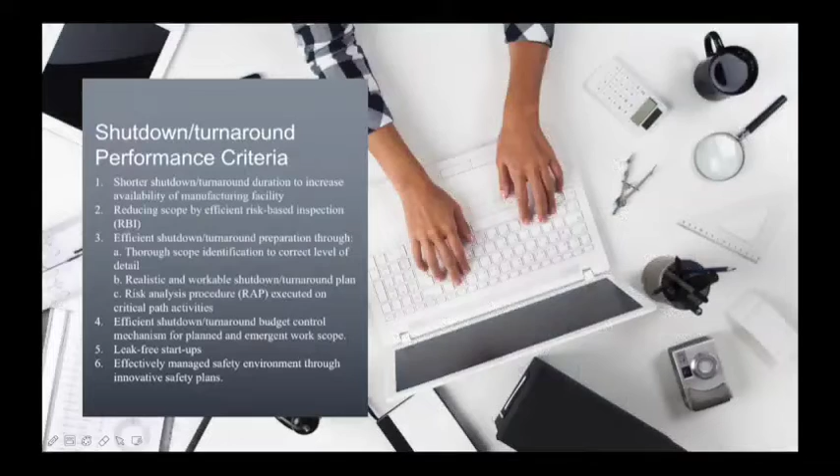And finally, shutdown or turnaround performance criteria. Shorter shutdown or turnaround duration to increase availability of manufacturing facility, reducing scope by efficient risk-based inspection, efficient shutdown or turnaround preparation through thorough scope identification to correct level of detail, realistic and workable shutdown or turnaround plan, risk analysis procedure executed on critical path activities, efficient shutdown or turnaround budget control mechanism for planned and emergent work scope, leak-free startup, effectively manage safety and environment through innovative safety plans.

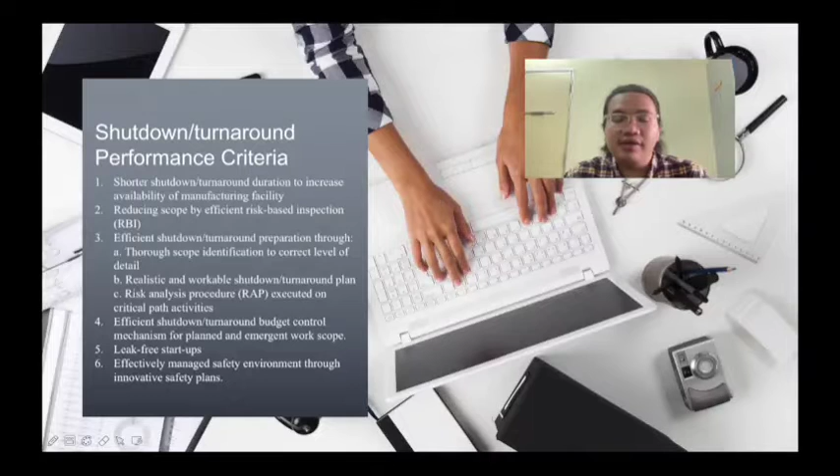Today, I would like to discuss my topic, which is planning. Shutdown planning is uniquely challenging and is considerably more challenging than routine running maintenance, as the shutdown durations are kept extremely short because of the need to keep the unit down to a minimum period. Not only that, planning is the technique of picturing ahead every step in a long series of separate operations and so indicating that for each step routine arrangement suffices to cause it to happen in the right place at the right time.

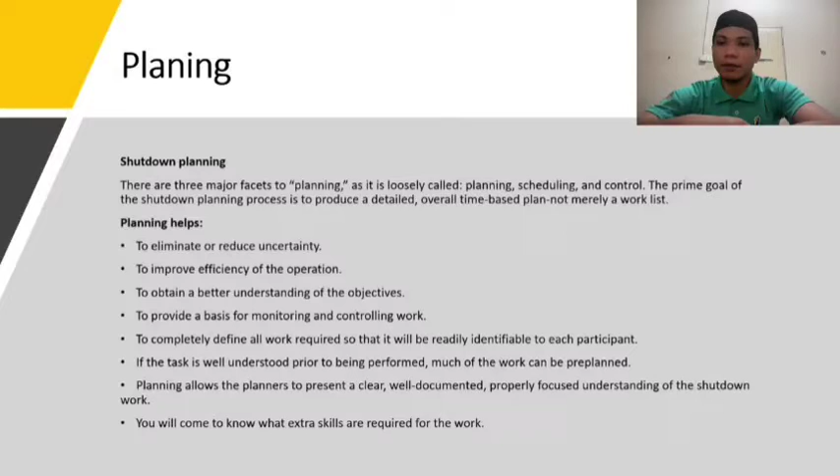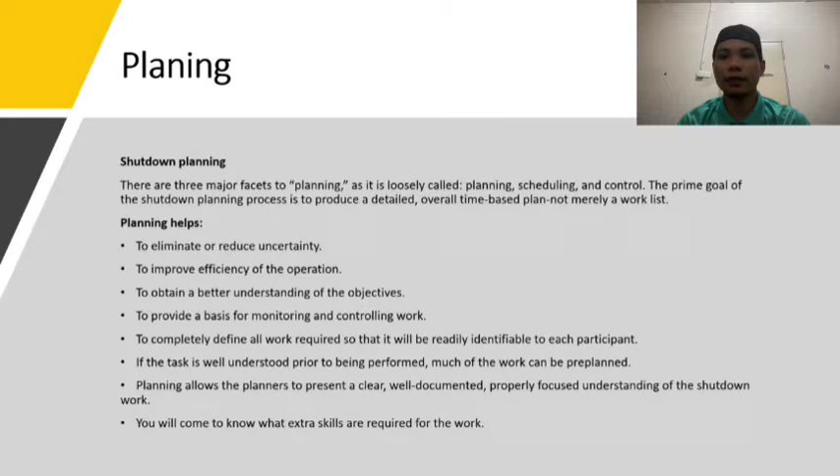Shutdown planning. There are three major facets to planning, as it is loosely called: planning, scheduling, and control. The prime goal of the shutdown planning process is to produce a detailed, overall time-based plan, not merely a work list. There are several planning helps.

First, to eliminate or reduce uncertainty. Second, to improve efficiency of the operation. Third, to obtain a better understanding of the objective. Fourth, to provide a basis for monitoring and controlling work.

Fifth, to completely define all work required so that it will be readily identifiable to each participant. Sixth, if the task is well understood prior to being performed, much of the work can be pre-planned. Seventh, planning allows the planner to present a clear, well-documented, properly focused understanding of the shutdown work.

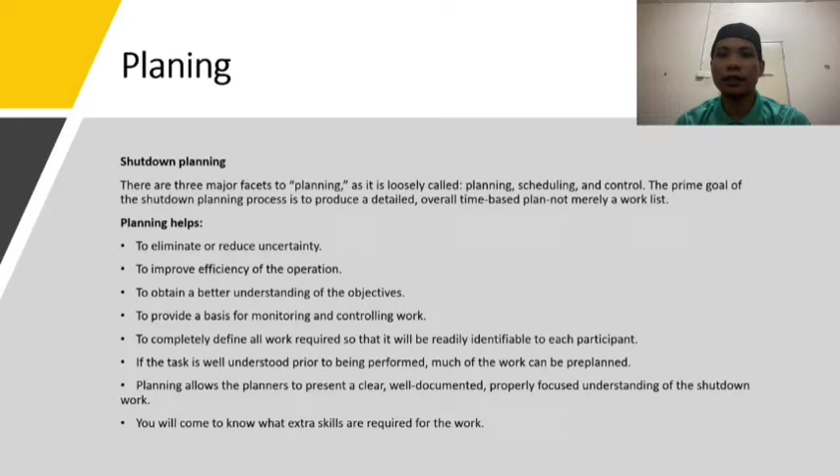Last but not least, you will come to know what extra skills are required for the work. Shutdown planning should begin 9 to 18 months before the anticipated shutdown takes place. 7 areas. First, procurement. Second, engineering. Third, maintenance. Fourth, operation. Fifth, quality assurance. Sixth, health, safety, and the environment, HSE, security. And the last one, administration.

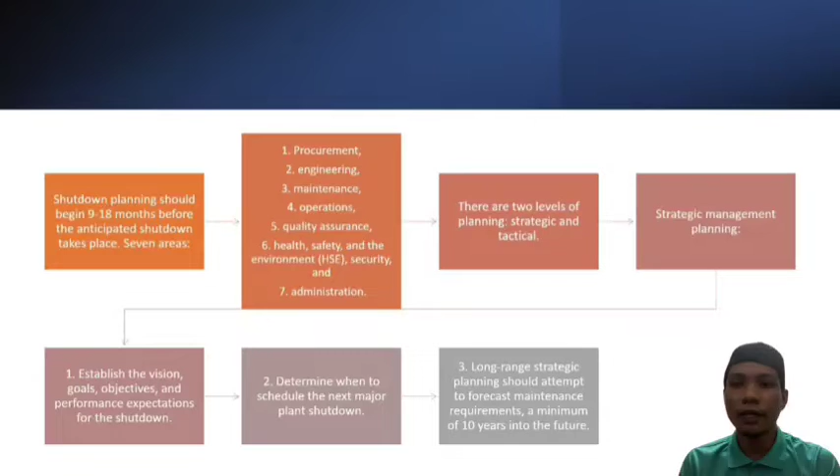There are two levels of planning, which are strategic and tactical. Strategic management planning means, first, establish the vision, goals, objectives, and performance expectations for the shutdowns. Second, determine when to schedule the next major plant shutdowns, as information from marketing, sales, accounting, operation, and maintenance is analyzed and incorporated into the business plans and can provide a long-term strategic plan.

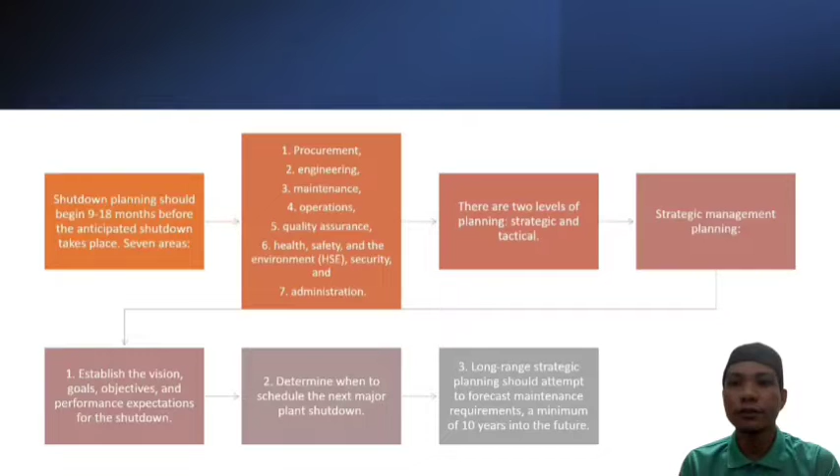Third, long-range strategic planning should attempt to forecast maintenance requirements a minimum of 10 years into the future. Fourth, a practical planned shutdown may be used to eliminate the process failing condition in one area of the plant. Fifth, process conditions such as internal fouling and catalyst life may require the plant to be shut down. A risk assessment of acceptable minimum flow rates and product specification will determine when the plant is required to come offline to correct this process bottleneck.

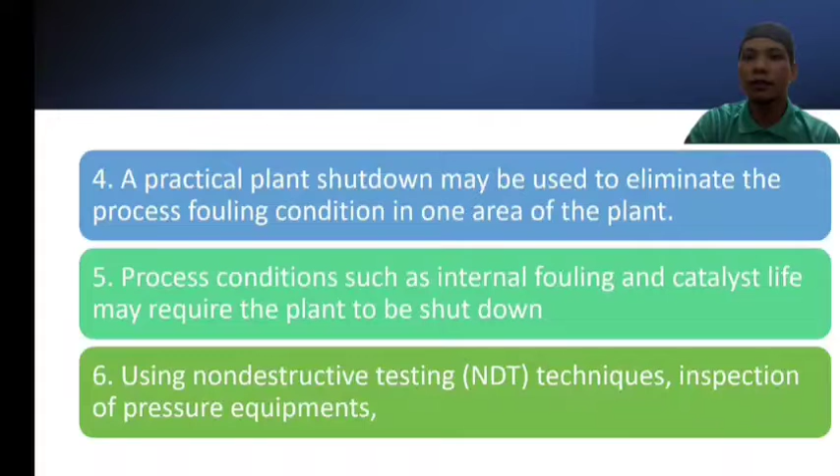Shutdown planning committee. Treat the shutdown like any other project using classic project management techniques. Applying project management techniques for planning, monitoring, executing, and controlling the progress of the shutdown can delineate various scheduling, resource, and cost questions such as: is the amount of work doable within the allotted period? What are the critical path jobs for completing the shutdown on schedule? Have enough resources, personnel, time, money been allocated? How much do I anticipate the shutdown to cost? Can I stay within budget?

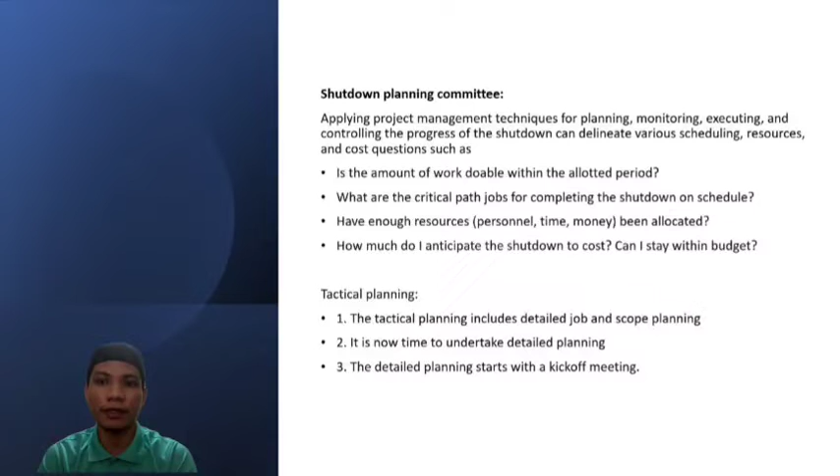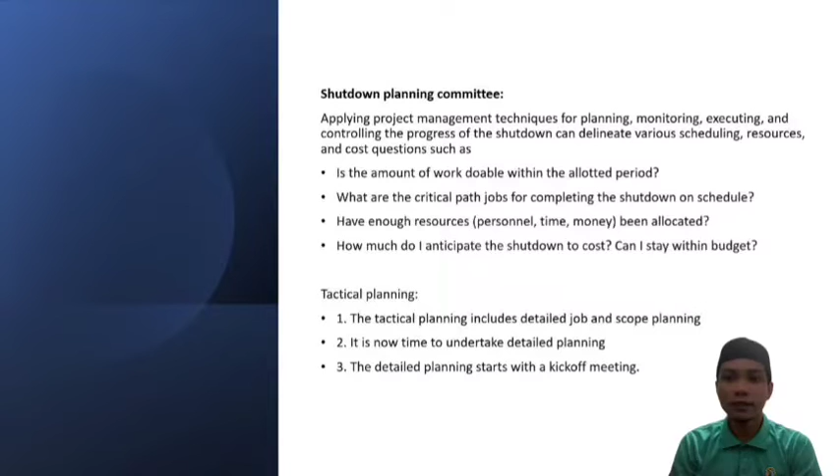There are three points of tactical planning. First, tactical planning includes detailed job and scope planning, preparing the estimate, preparing the shutdown organization, and detailed planning for quality and safety. Second, it is now time to undertake detailed planning to ensure that the activities performed in the execution phase of the project are properly sequenced, resourced, executed, and controlled. Third, the detailed planning starts with a kick-off meeting.

There are 4 kick-off meeting points. First, the major players responsible for planning, including the shutdown manager, section engineers for certain areas of knowledge, subject matter experts, and functional leads. Second, the major players are usually authorized by their functional area to make decisions concerning timing, cost, and resource requirements. Third, the following subjects: turnaround policy, plant standards, work list, major task review, project review, inspection review, spares review, safety review, quality review, and site logistics.

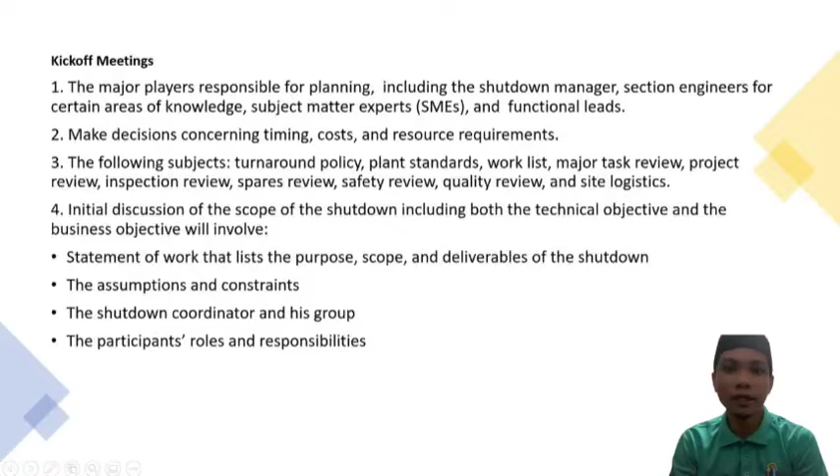Fourth, initial discussion of the scope of the shutdown, including both the technical objectives and the business objectives, will involve: first, a statement of work that lists the purpose, scope, and deliverables of the shutdown. Second, the assumptions and constraints. Third, the shutdown coordinator and his group. And the last one, the participants' roles and responsibilities.

Job of the planning team. There are 11 typical roles and responsibilities, which would include but not be limited to: first, gathering basic data for planning from plant and other necessary personnel. Second, producing task specifications and networks for all small tasks. Third, specifying bulk work tasks and listing them on control sheets. Fourth, producing material requirement sheets for specified tasks. Fifth, producing equipment and service requirement sheets.

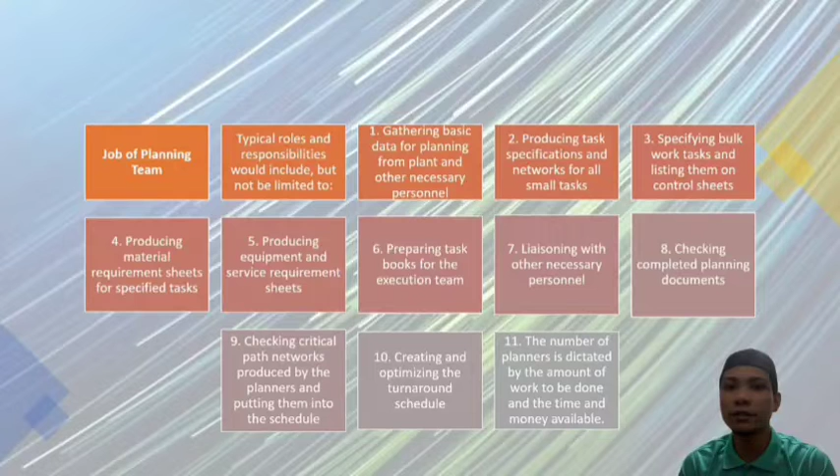Sixth, preparing task books for the execution team. Seventh, liaising with other necessary personnel. Eighth, checking complete planning documents and passing them to plant personnel for validation. Ninth, checking critical path networks produced by the planner and putting them into the schedule. Tenth, creating and optimizing the turnaround schedule. Last but not least, the number of planners is dictated by the amount of work to be done and the time and money available.

Planning step 1. There are 8 points we need for developing the shutdown work list. First, the goal of the shutdown planner should be to produce a detailed time-based plan. Development of the shutdown work list should begin immediately after completion of the preceding shutdown. Second, during the period between shutdowns, maintenance technicians should add potential work to the work list as they recognize the work.

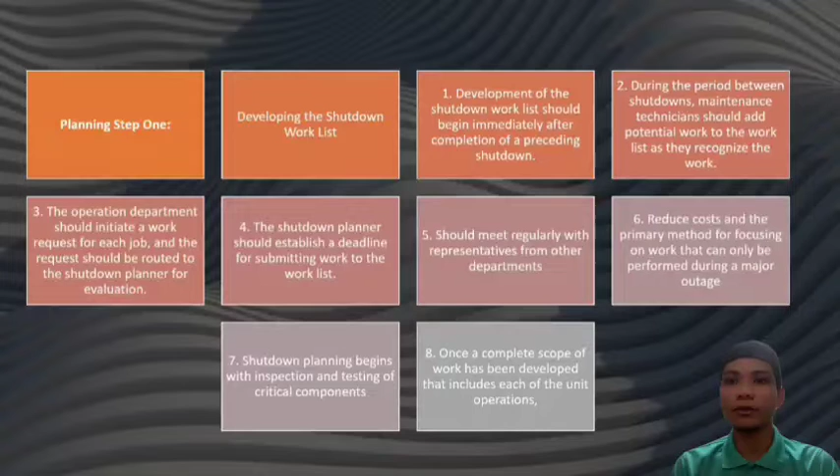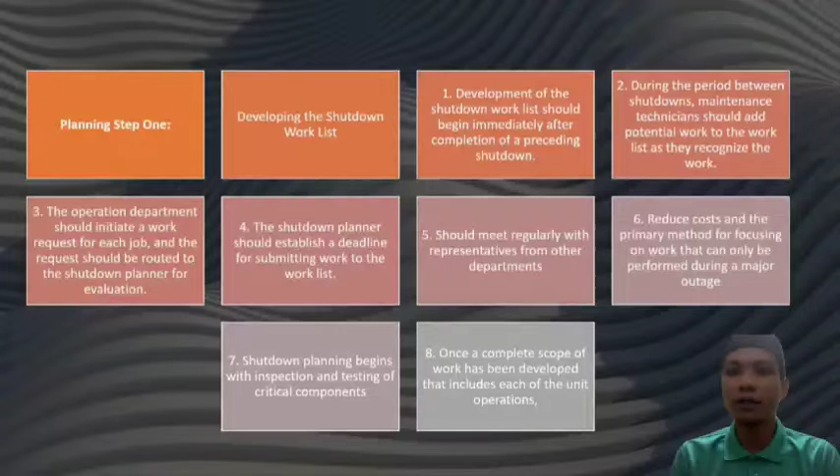Third, the operation department should initiate a work request for each job and the request should be routed to the shutdown planner for evaluation. 4. The shutdown planner should establish a deadline for submitting work to the work list. 5. The shutdown planning team should meet regularly with representatives from other departments involved in the shutdown to review the work list. 6. Keeping the list short is both a means to reduce cost and the primary method for focusing on work that can only be performed during a major outage.

7. Shutdown planning begins with inspection and testing of critical components such as relief valves, repair, and replacement of damage. 8. Once a complete scope of work has been developed that includes each of the unit operations, the material, manpower, and duration of the work can be determined for each of those units.

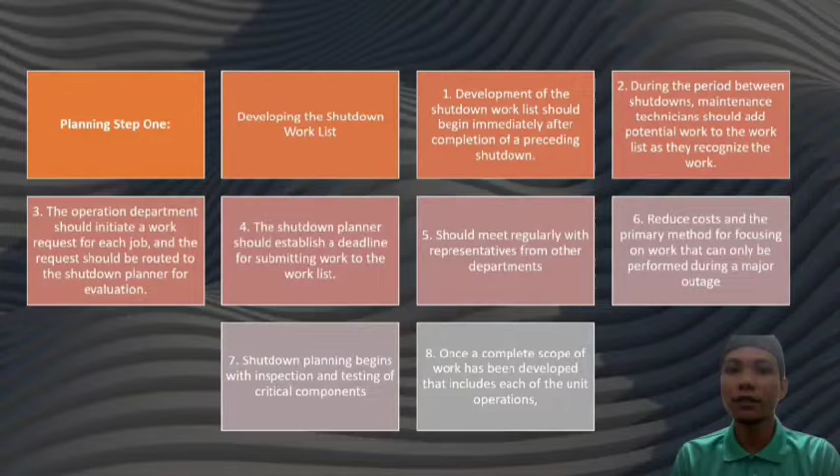There are 4 work lists we should follow. First, throughout the period between shutdowns, all prospective work should be registered as soon as it is recognized. Second, as each job is identified, it should be written up, a work request generated, and passed to the nominated shutdown planner for evaluation. Third, a cut-off date for submitting work requests should be set. And the last one, after this deadline, no further jobs should be admitted to the work list without the approval of higher management.

There are 6 for the work list meeting. First, turnaround manager. Second, planning team. Third, plant or production manager. 4. Maintenance manager or whoever is responsible for the maintenance function. 5. Plant supervisor. And the last ones, Electrical and Instrumentation Engineers and Supervisors.

Inspection Review Meeting. The purpose of the major task review meeting is to ensure that large, complex, or hazardous tasks are given the due consideration that their importance merits, so that a relevant specification for the task may be produced. Now we move to the project work review meeting. The meeting should ensure that the project work normally planned by the project department is properly integrated into the turnaround schedule, so that all conflicts are resolved and requirements met.

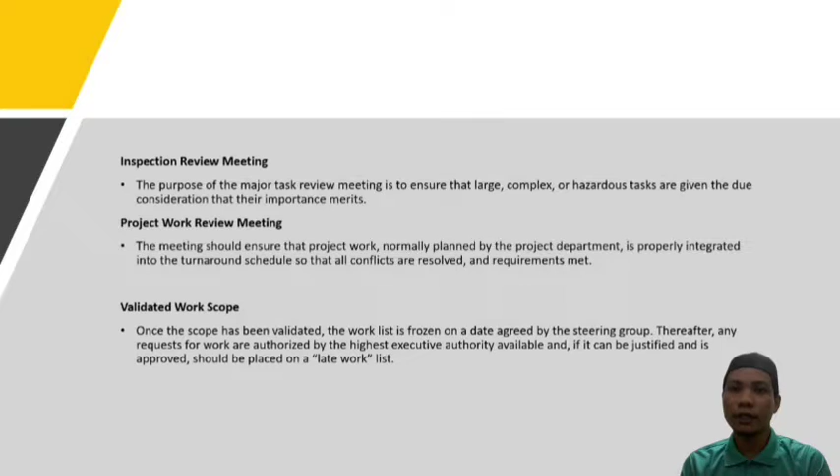There are three stages in planning the work scope. First, pre-shutdown. You should identify these tasks and schedule them to take place during the pre-shutdown stage. Second, shutdown. These tasks should include any preparatory work that could slow progress during the shutdown stage. And last but not least, post-shutdown. The post-shutdown stage should include maintenance activities that technicians can complete after production startup activities begin.

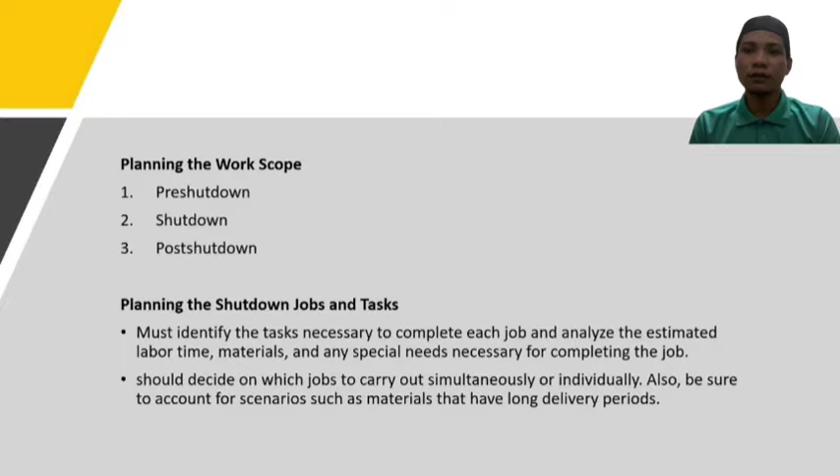Planning the shutdown jobs and tasks. First, you must identify the tasks necessary to complete each job and analyze the estimated labor time, material, and any special needs necessary for completing the job. After that, you should decide which jobs to carry out simultaneously or individually. Also, be sure to account for scenarios such as materials that have long delivery periods.

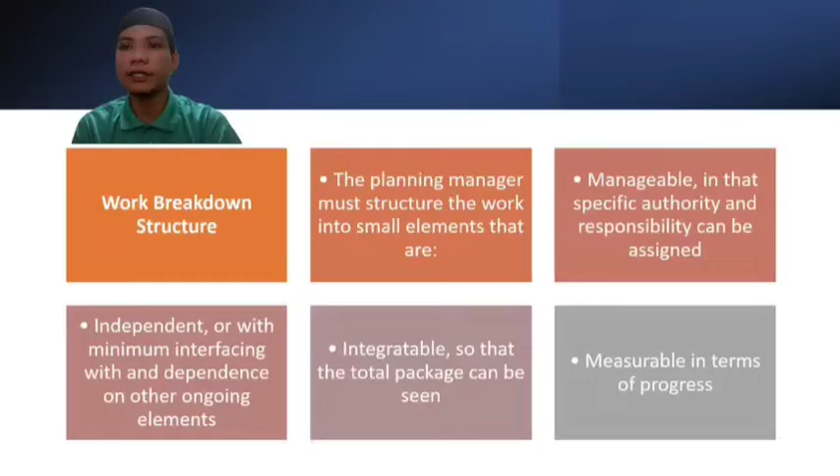Work breakdown structure. Planning managers must structure the work into small elements that are: first, manageable, in that specific authority and responsibility can be assigned. Second, independent or with minimum interfacing with and dependence on other ongoing elements. Third, integratable so that the total package can be seen. The last one, measurable in terms of progress.

The work breakdown structure is the single most important element in planning because it provides a common framework from which, first, the total program can be described as a summation of subdivided elements. Second, planning can be performed for the shutdowns. Third, the WBS provides a detailed structure to estimate and capture costs for equipment, labor, and material on each task. It lays the groundwork for developing an effective schedule and good budget plans.

4. Objectives can be linked to company results in a logical manner. 5. Schedule and status reporting procedures can be established. 6. Network construction and control planning can be initiated. The responsibility assignment for each element can be established. 7. The statement of work defines scope at the conceptual level. A comprehensive look at the shutdown scope can be accomplished only with a WBS.

8. The tasks on the WBS become the basis for monitoring progress because each is a measurable unit of work. Time, cost, and performance can be tracked. 9. The level of detail in a WBS makes it easy to hold people accountable for completing their tasks.

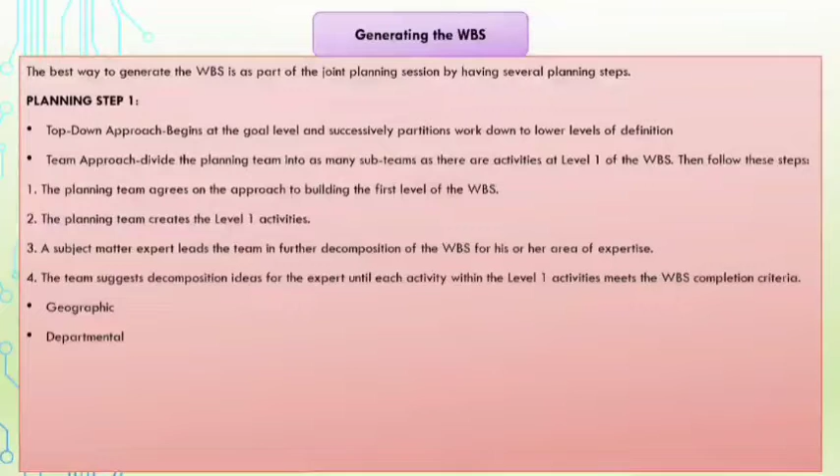For planning step 2, we identify task relationships, which is the sequence in which detailed tasks such as work packages are performed, determined by the relationship between the tasks. Secondly, we calculate the critical path, which helps maintain, control, and keep the project on schedule. As activities are completed ahead of or behind schedule, the critical path will change.

Moving to planning step 3, we focus on manpower strategy planning, where choosing the right people for the shutdown team becomes job number one. We need specialists who can either lead skilled work groups or execute jobs on their own. We also focus on determining the skills needed, since having identified the work packages through the WBS, the shutdown manager has a good idea of the skills required of the shutdown workers.

Planning step 4 involves estimating work packages to determine the cost and duration of the shutdown. It's necessary to build a cost and schedule estimate for each work package, called bottom-up estimating. Planning step 5 is calculating an initial schedule, key to establishing realistic schedules and meeting them. The initial schedule is calculated using the network diagram and the duration of each work package to determine start and finish dates for each task and the entire project.

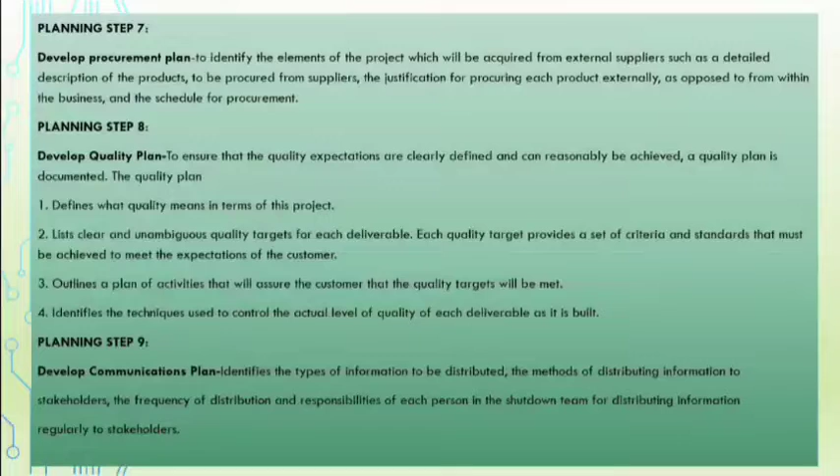Going to planning step 9, we should develop a communication plan to identify the type of information to be distributed, the methods of distributing information to stakeholders, the frequency of distribution, and the responsibility of each person in the shutdown team for distributing information regularly to stakeholders.

Lastly, planning step 10, which requires us to develop a risk plan to mitigate all critical project risks prior to entering the execution phase of the project.

Once the planning is completed, there is a need for detailed planning and accurate cost estimate. The detailed cost estimate becomes the standard for keeping costs in line. The full commitment and support of senior management is vital for the turnaround success.

They must be committed to the following: frozen work list. Work for turnaround should be the work that cannot be undertaken at another time. Thirdly, releasing staff and resources as needed. Fourthly, minimizing additional work. Fifthly, creating a work environment where turnaround planning and execution are shared responsibilities. And finally, encouraging a team spirit and attitude to understand and help each other.

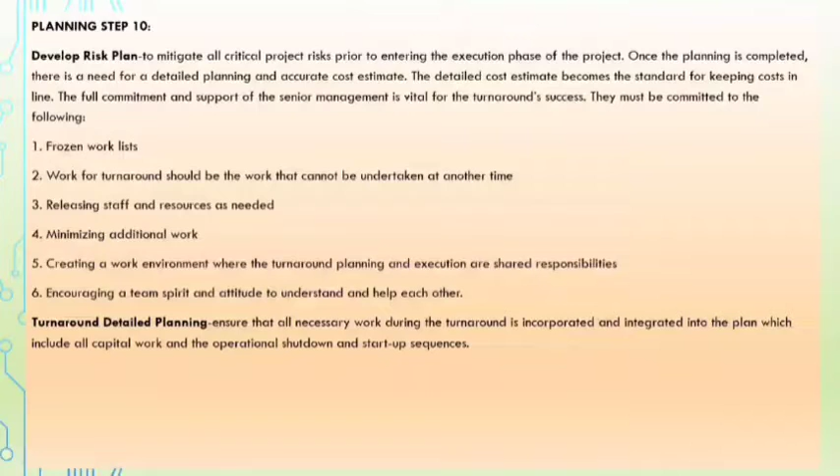Turnaround detailed planning is to ensure that all necessary work during the turnaround is incorporated and integrated into the plan, which includes all capital work and the operational shutdown and startup sequence.

Next, I will explain the job and task planning in detail, in which all work list proposals must pass through the core team for review and impact assessment.

The core team's activities should focus on firming up all turnaround work inputs, which include risk-based inspection and reliability items, capital works, compliance items, HAZOP study outputs, operational requirements, process engineering requirements, environmental safety and health needs, and lastly, maintenance requirements, which include maintainability, reliability, and constructability reviews.

Secondly, resolution of conflicting needs, and lastly, long lead time material procurement. The work list should be finalized 12 to 18 months before the shutdown date. It is a key role of the core team to ensure that this happens. The core team leader establishes cut-off dates for turnover of capital items that must be adhered to.

Next is the additional work, which could be an oversight or that which arises during execution. During this stage, the core team activities should focus on the final work list, final plan for equipment cleaning and personnel entry, contracting plan in place and all major contracts, critical path schedule, detailed execution plans, detailed safety plan, additional work approval process, turnover of all capital work, completion of materials procurement plan and long lead time materials order, what-if scenarios, lifting plans, mobile equipment requirements, final estimate, and lastly, definition of format and frequency of performance and progress report.

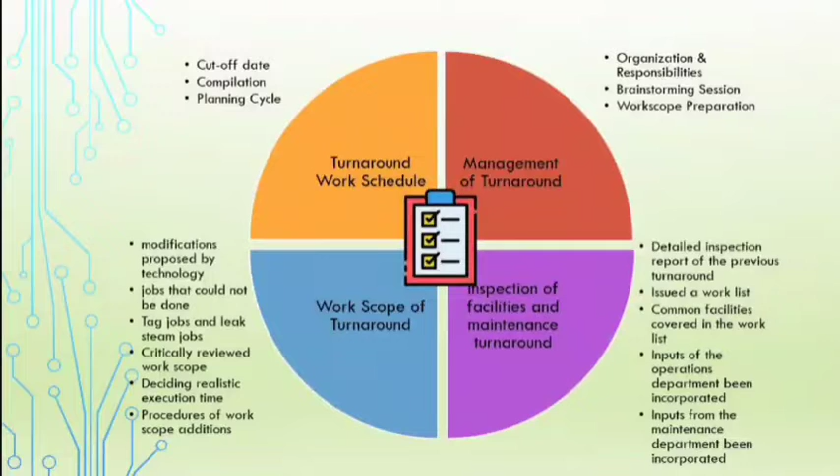For instance, has the realistic execution time been decided for the agreed work scope? Has a well-managed content and complete work scope for the turnaround been prepared before the cutoff date? Have all the jobs in the work list been checked for meeting turnaround criteria?

As I mentioned earlier, there is a work list in the checklist, which consists of material codes for stock items required, purchase order number and location for direct charge items, drawing reference, spec list, hydro testing pressure, name of contractors for various jobs, gasket schedule, size and rating of line, and finally, detailed procedure of job.

Next, I'm going to explain about the information requirement for planning. Effective maintenance turnaround planning requires reliable information. Gathering and using reliable information to plan your next maintenance turnaround will improve your planning and scheduling efficiency.

You can get the information from SAP or any other computerized maintenance management system software. These tools can maintain the historical information from previous maintenance turnaround. The information you need falls under the following categories, such as master equipment list, work scope and prioritization, tools and equipment, materials, time, labor, safety, quality, and lastly, cost.

Next, I'm going to explain about the common planning failures. Firstly, the failure to plan in sufficient detail, such as sometimes shutdown managers make an attempt to plan but don't do it in enough detail. Secondly, failing to plan and schedule project work in enough detail can result in three significant undesirable effects.

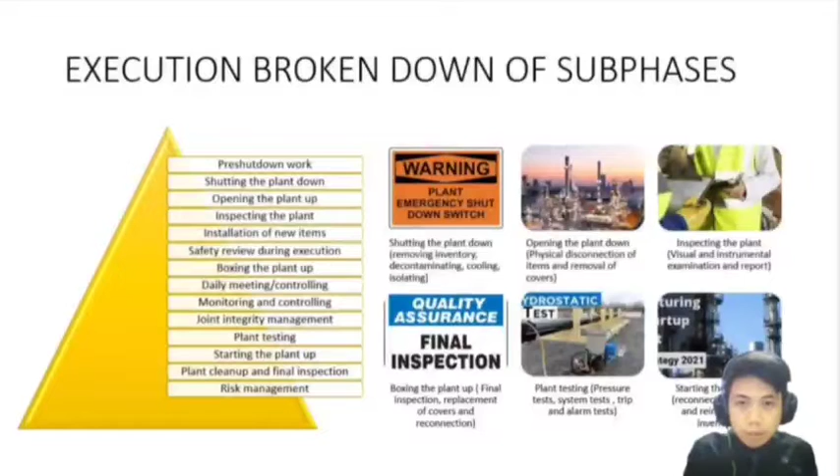Inspecting the plant means we inspect using visual and instrumental examination and report. Boxing the plant up means we do final inspection, replacement of covers, and reconnection. Plant testing means pressure test, system test, trip, and alarm test. Last but not least is starting the plant up, meaning reconnecting the service and reintroducing the inventory.

So the most common safety questions during the shutdown that should be asked are: have all personnel, including contractors, been briefed on personal protective equipment requirements? Are safety procedures such as lockout, vessel entry, and hot work understood by all? Will a crane or other overhead device be used in this area?

And then, will two or more groups be working in close proximity? Then we have: what type of lockout will be used? Will adequate lighting be available? Are safety clearances needed for the job?

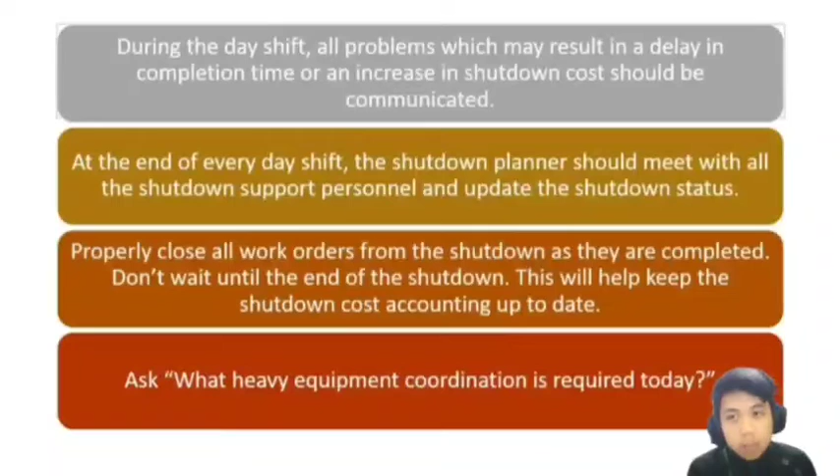And next, during the day shift, all problems which may result in a delay in completion time or an increase in shutdown cost should be communicated. At the end of every day shift, the shutdown planner should meet with all the shutdown support personnel and update the shutdown status. And we have properly closed all work orders from the shutdown as they are completed. And last but not least, we have to ask what heavy equipment coordination is required today.

So for reporting status, the shutdown planner should prepare to report the status of the shutdown at any time, and the progress with respect to eventual startup time. Any situation that may extend the shutdown should be reported immediately. And then the shutdown manager must report progress quicker than originally estimated. And last but not least, the program evaluation and review technique chart provides the best overall look at the shutdown.

So first we must update the software, identify overall shutdown status, and then the system rescheduling activity, and a reporting system for daily shutdown and monitoring. Coordination among departments, maintenance and production, is also important. The next is monitoring and reporting formats for maintenance, and preparing for unplanned or unforeseen jobs. And last is a record of shutdown execution and completion.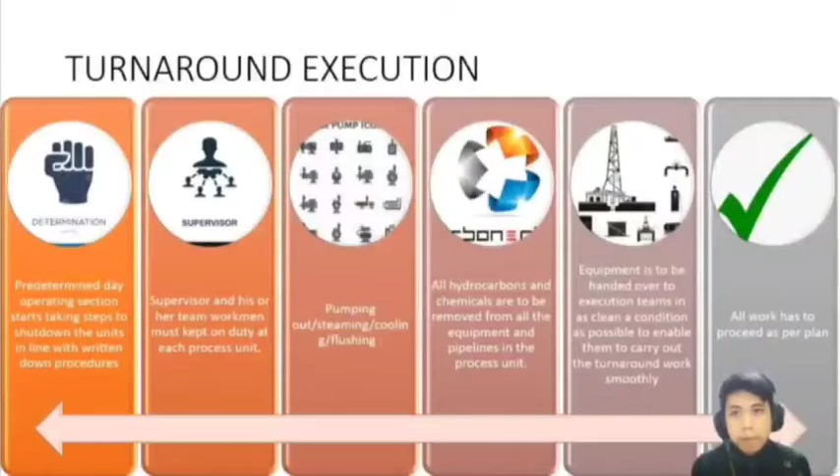So when it comes to turnaround execution, first, on a predetermined day the operating section starts taking steps to shut down the unit in line with the written-down procedure. And then we must talk to the supervisor and his or her team. Workmen must be kept on duty at each process unit. And we ensure pumping out, steaming, and cooling.

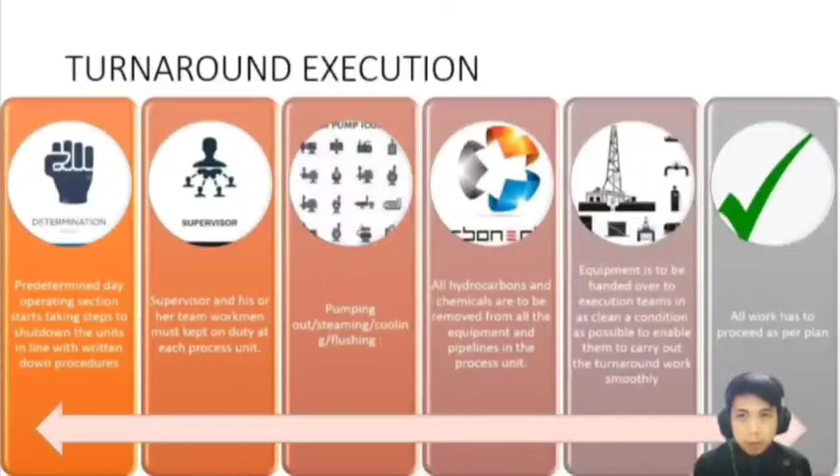All hydrocarbons and chemicals must be removed from all the equipment and pipelines in the process unit before the execution or shutdown starts. And last but not least, equipment is to be handed over to the execution teams in as clean a condition as possible to enable them to carry out the turnaround work smoothly. And all work has to proceed as per plan.

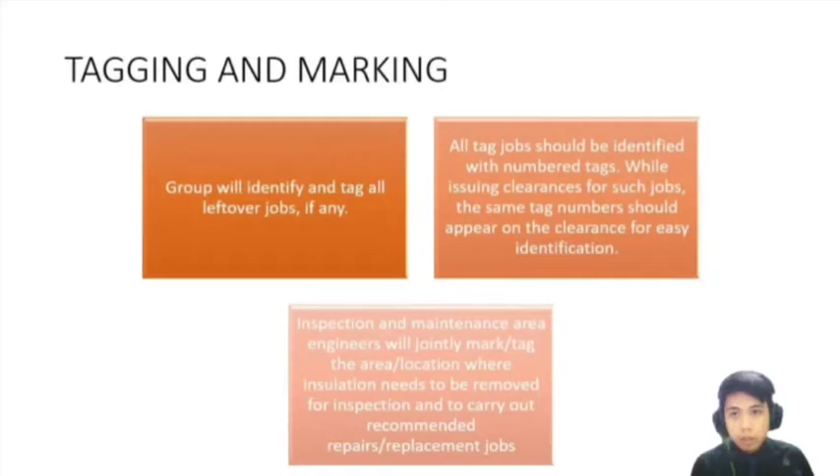So tagging and marking. The purpose of tagging and marking is to ensure the group will identify and tag all leftover jobs, if any. All tagged jobs should be identified with number tags. While issuing clearance for such jobs, the same tag number should appear on the clearance for easy identification. Last but not least, the inspection and maintenance area engineers will jointly tag the locations where insulation needs to be removed for inspection and to carry out recommended repair and replacement jobs.

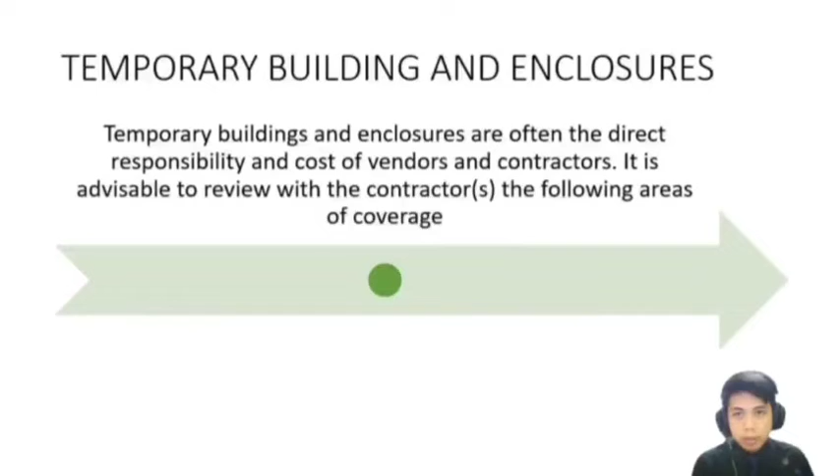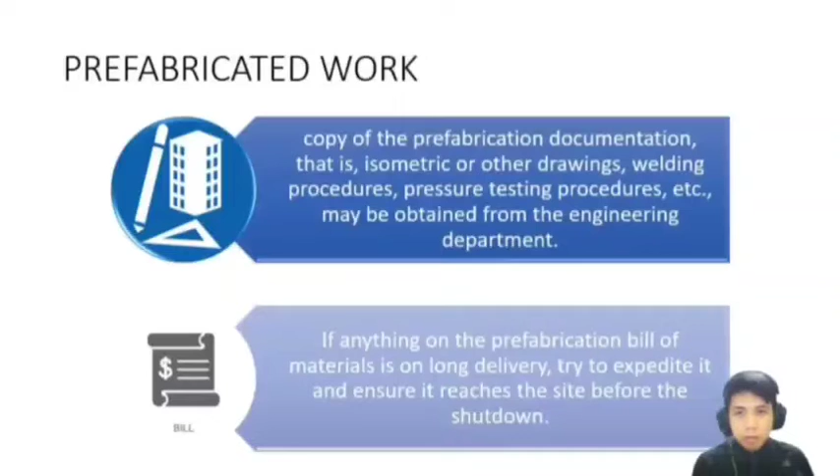For temporary buildings and enclosures, these are often the direct responsibility and cost of vendors and contractors. It is advisable to review with the contractors the following areas of coverage. For pre-fabricated work, keep a copy of the pre-fabrication documentation, that is isometric or other drawings, welding procedure or pressure testing procedure. Next, if anything on the pre-fabrication bill of material is on long delivery, we must try to expedite it and ensure it reaches the site before the shutdown.

When it comes to crowd control, to avoid crowding in the shutdown area, use programmable magnetic cards and portable readers. It is great to speed up the entry and exit process and helps to ensure accurate crowd control. Next, we have a magnetic card that can be programmed with an employee's name and company as well as other pertinent information. And last but not least for crowd control, when the card is swiped through the reader, it notes the exact date and time with the card information in detail.

Contractors insurance certificate. For on-site contractors or other outside service, most organizations require minimal liability protection as well as proof of workers' compensation coverage. The majority of contracting organizations only purchase this insurance for the brief period required. The presence of a contractor in the facility earlier this year does not mean that any coverage received for that job is still valid.

If a shutdown extends beyond an earlier expected completion date, insurance coverage that was obtained for the original time period must be extended by the contractor or it will become invalid. For contractor insurance certificates, a file should be maintained to minimize third-party litigation in the event of injuries, death, or major damage.

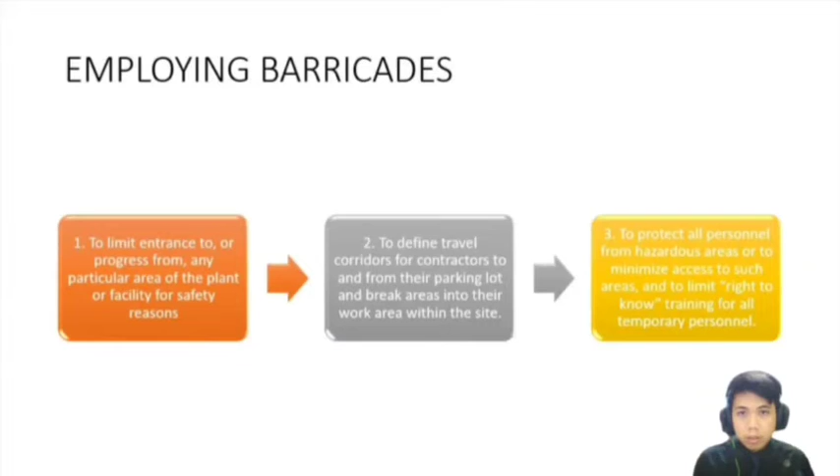The reason why employing barricades is important is to limit the entrance or progress from any particular area of the plant or facility for safety reasons. Number two is to define travel corridors for contractors to and from their parking lot and break areas into their work area within the site. Number three, to protect all personnel from hazardous areas or to minimize access to such areas and to limit right-to-know training for all temporary personnel.

For emergency showers and eye baths, these units are available on a rental basis with pressurized and temperature-regulated water supplies, and the rental company can also be contracted to provide regular documented inspection and testing. So don't forget to request copies of such inspections for our own records for safety purposes.

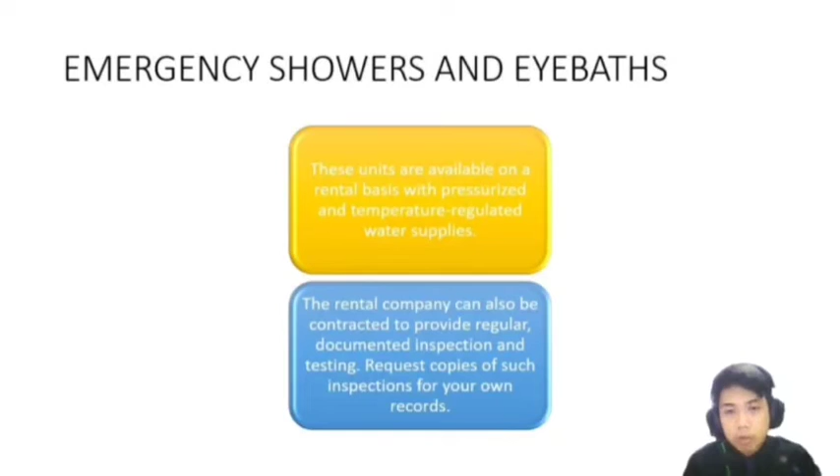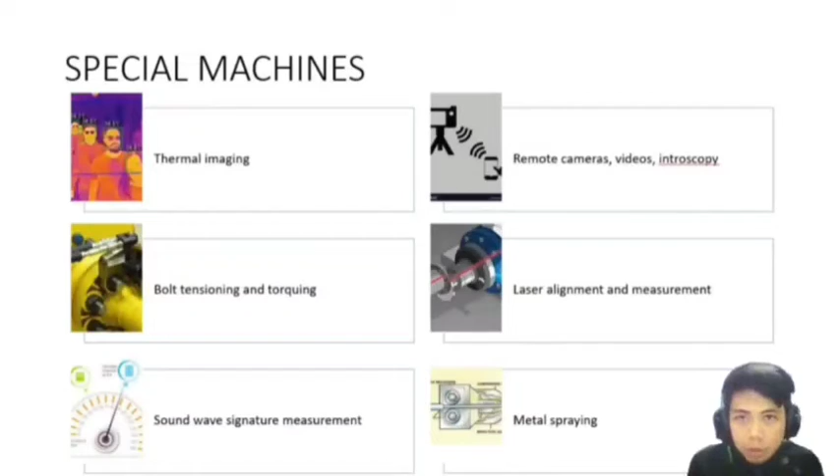Then for special machines, these are special machines that can save time and money when shutdown activities are done. We have thermal imaging, bolt tensioning and torque, sound wave signature measurement, remote cameras, video and introscopy, laser alignment and measurement, and also metal spraying.

When it comes to vendor's representatives, in certain cases a vendor's representative is required on site for expert advice. In order to ensure that they will be on site when required and can provide a good service, ask the vendor to visit the site beforehand, if required, to check the equipment before the turnaround starts. If the vendor is from overseas, arrange for his visa at an early date, and the preparation should be such that there is no problem during execution. So that's all from me.

The next topic will be presented by my friend. Thank you. Assalamualaikum and good day. My name is Ahmad Habizan bin Jetan and my ID is VA19028. Today I will be explaining the controlling process in chapter 2 for shutdown phases.

First of all, in the controlling process, there are 6 things you must be competent in and know well. First is tracking progress. Basically, you can review where you have been in your shutdown processes. It can be compared with the original schedule as planned by the planner. So it is a big role for the shutdown manager to confirm with all coordinators and the planner. For example, we can review any job daily, weekly, monthly, or by stages.

The second one is detecting variance from plan by variance report. What is a variance report? With a variance report we can control quality as requested by the client. The third one is forecasting and evaluating potential problem areas. It is a huge thing that management must create an evaluation form for seeking potential problem areas to get zero accidents as per the campaign.

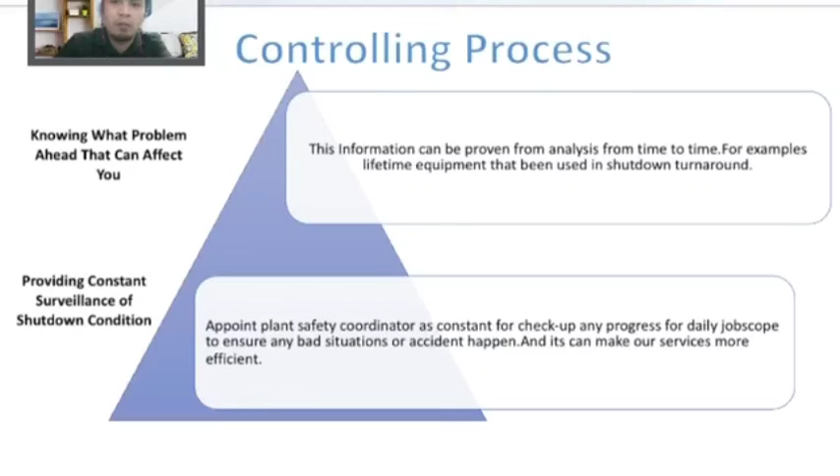Last but not least, providing constant surveillance of shutdown condition. We can appoint a plant safety coordinator to check up on the daily job scope. For example, patrolling potential problem areas instead.

The next one is what actually you're controlling. Of course, schedule, cost, functionality, and quality. For example, will the shutdown complete on time? And the cost must be reduced, but at the same time, 100% quality indeed.

Functionality: will the shutdown be delivered to the client as expected. And quality is the most important, to get full trust from the client for the next project. To get successful controlling for all that was explained before, there are 4 key process elements that are important.

First of all is a baseline of measurement. The next one is processes and methods for gathering data, with emphasis on timeliness. Last but not least, processes, tools and methods for analyzing past, present and future performance.

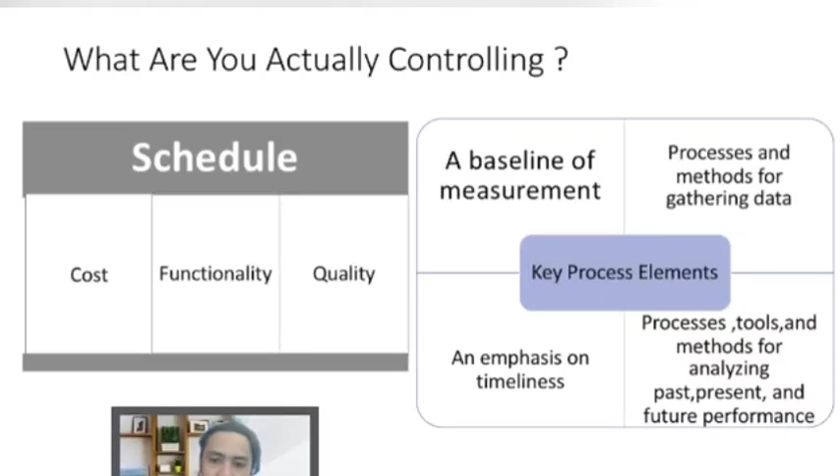We all know that baselines are important in the process elements. There are a few types of baseline. The first baseline is the scope baseline. Majorly it's the sum of the deliverables of the shutdown. It starts from the original scope baseline, and all changes must be approved to add to or subtract from the original baseline.

For example, any disruption on schedule happens due to heavy rain, and of course, workers' safety is also our top priority. The next one is the time baseline. Basically it refers to the scheduling of all work that will be done as planned, and every data given should be evaluated to maintain control of the shutdown process. Majorly, it can be classified as an evaluation process for maintaining control of the shutdown process.

Last but not least, the cost baseline. Budget and cost for all shutdown processes are estimated until all jobs are done, and the cost estimates are determined by the work breakdown structure. And it refers to the budget from the estimated time until the work is done.

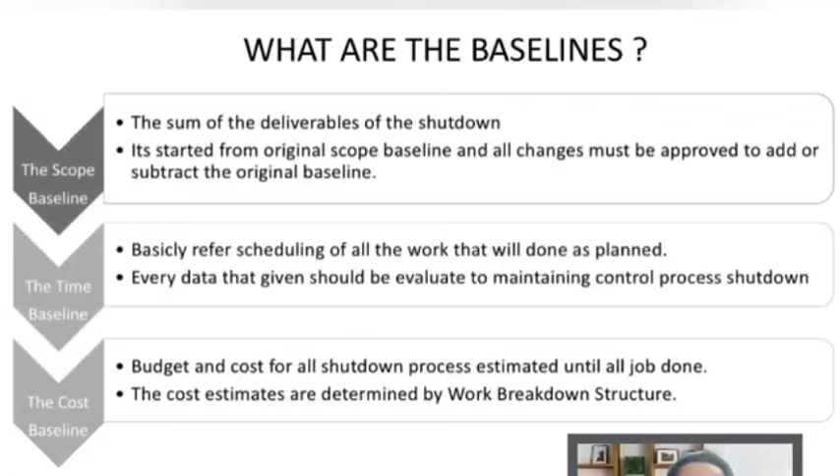Measuring progress. Measuring progress can be defined as tracking throughout the shutdown. Next, warn of pending problems in time to take action. Lastly, it's easily understood by those who have a need to know. For a good result, we also need to analyze the schedule given, and it has 3 characteristics: the original baseline plan, the amount of progress made, and the forecasted time to complete.

Next one is the control process. Every control process is designed to spot problems early. It's a big role for the shutdown manager to measure and evaluate all the costing and plan. There are 5 steps in the control process. The first one is define what will be measured and how often. This should incorporate business requirements, cost, constraints, technical specifications, and deadlines, along with a preliminary schedule for monitoring, and include who is responsible for it.

The next one is monitor progress and evaluate deviation from the plan. 2 kinds of information are collected. The first one is actual shutdown data, which includes time, budget, and resources used, and completion status of current tasks. Second is unanticipated changes, including changes to budget, schedule, and scope.